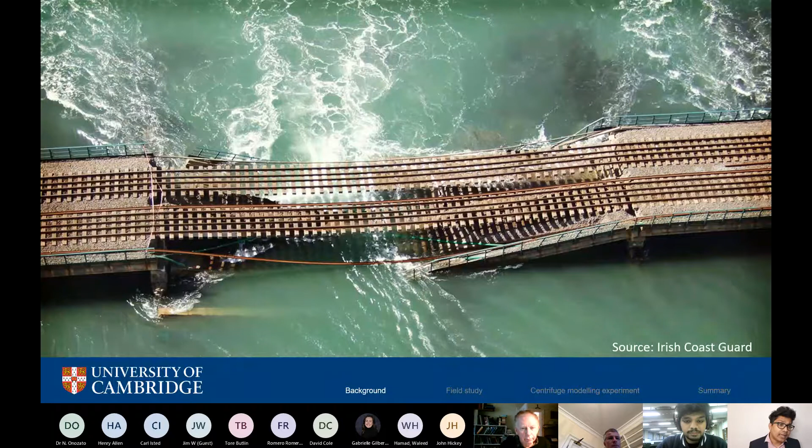Scour is a massive problem for bridge engineers. This is Malahide Viaduct, and this bridge failed because of scour, exactly 10 years ago in Ireland. If you look at some of the bridge failures that happen around the world, more than 50% of bridges fail because of scour. So that's a massive problem for bridge engineers.

What is scour? Scour is simply the removal of soil around bridge foundations because of the fast flowing nature of water. Looking at it without soil, without water, we can see what's happening: water hitting the bridge piers, and because of the fast flowing nature of water, scour holes are created around the bridge foundation. Since the bridge foundation is supported on the soil, if that soil support is lost because of scour, the bridge becomes unstable. This is exactly why a large number of bridges fail.

To avoid this from happening, we need to be able to monitor scour. Typically we can do visual inspections if there's a crack on the superstructure of the bridge, but scour happens underwater, so it's often difficult to observe because of the water layer. The current techniques for monitoring scour - the most common is diving inspection. Diving inspection does not provide reliable information because we can't carry out diving during flooding, which is when scour is highest, and it provides very limited, not very accurate information.

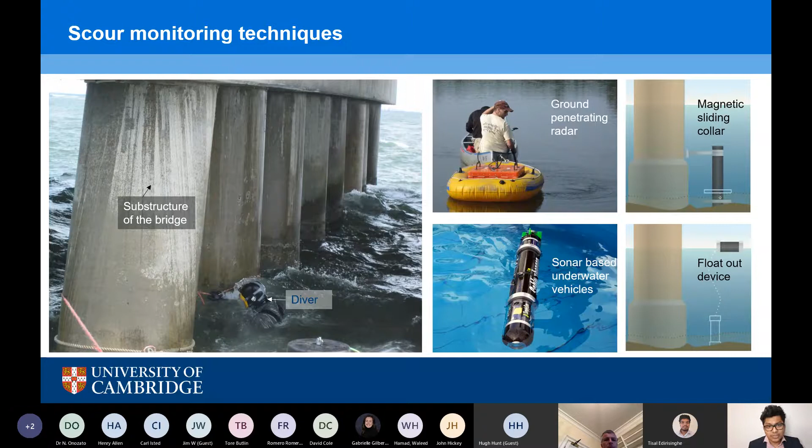Because of that, we can't measure that. The most common, or second most common technique, is actually using sonar. There are sonar-based underwater vehicles and sonar-based fixed techniques. These showed some good results, but there are still problems related to environmental sensitivities. So there are a wide number of monitoring techniques available, but they have a number of limitations. This is where vibration-based techniques can show some potential.

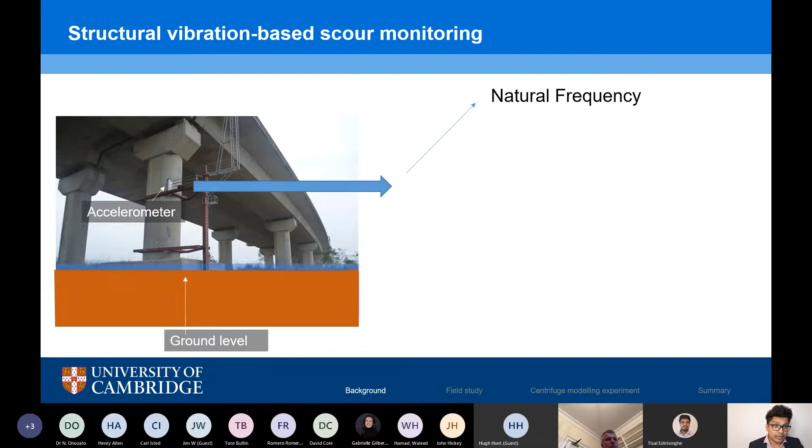Vibration-based monitoring techniques are very common. With vibration-based monitoring, what we simply do is place accelerometers on a bridge and measure the vibration-based properties. The idea is that whenever damage occurs, the vibration-based properties would change. The most common parameter is natural frequency, and there are other dynamic parameters as well.

For the case of scour, scour is basically an increase of the exposed height. So in the case of scour, this h is increasing while all other parameters are constant. If h is increasing and all other parameters are constant, we can see there's a significant relationship between natural frequency and the exposed height.

For this very simple case, where we assume the ground level is fixed - which is not the case in real life - we can see that natural frequency and exposed height have a significant relationship. Because of that, we can assume scour has a significant relationship with natural frequency. Previous researchers proposed that natural frequency can be used as an indicator of scour, but there's very limited information on other dynamic parameters. In my research, I proposed we can use two other indicators as well.

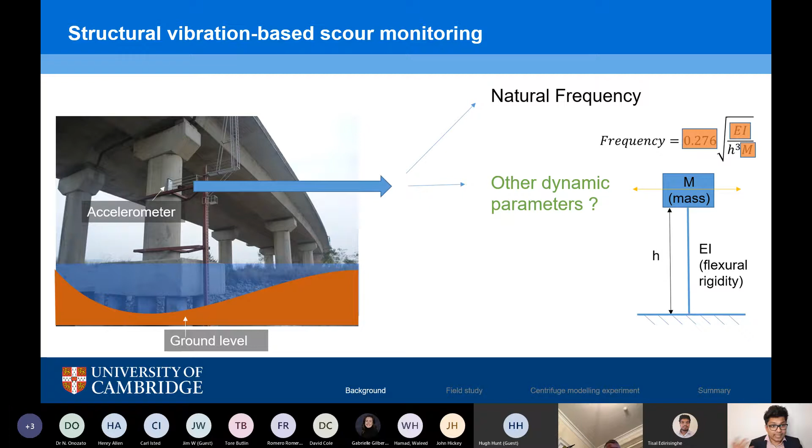But with scour, what we actually have is a global stiffness change, because it's actually a boundary condition change. So we can expect a more significant effect from scour than from cracks. If you look at existing literature on field studies to capture scour using vibration, there is one research conducted in the US.

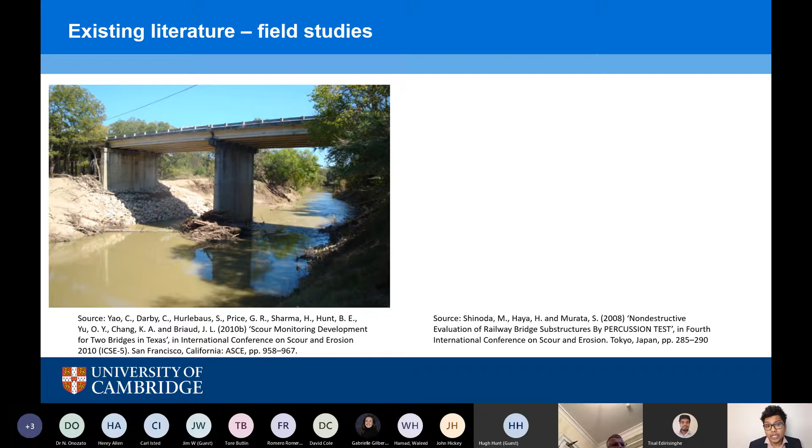They deployed accelerometers on two bridges in Texas - this is one of the bridges. But the issue is that during the monitoring period, they were not able to capture any significant change in natural frequency. In Japan, researchers have been able to actually capture natural frequency changes at a bridge there.

This bridge had about six bridge piers, and these piers had different amounts of scour. They were able to look at the natural frequency of each bridge pier and show that natural frequency of different piers correlates to their level of scour. So this research was successful in indicating that natural frequency and scour depth have a relationship.

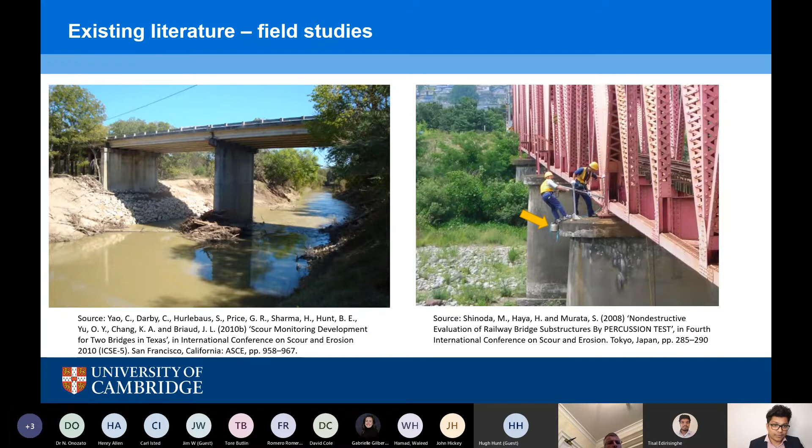But with this research, because they were trying to measure natural scouring, they were not able to get enough scour to change the natural frequency by a significant amount. So we actually decided to take a different approach.

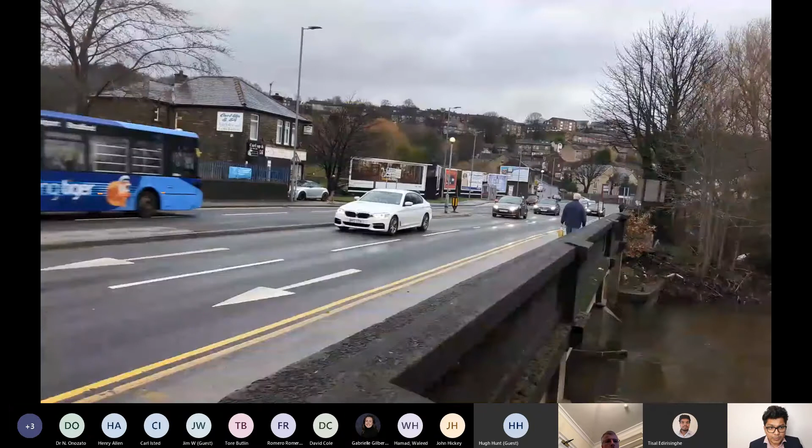Rather than looking at natural scouring, which is very unpredictable, we went to a bridge which already has scour - that's the Baildon Bridge. My supervisor sent an email to many bridge owners in the UK, and they found this bridge. This is Baildon Bridge, and it has three spans, with a history of severe flooding.

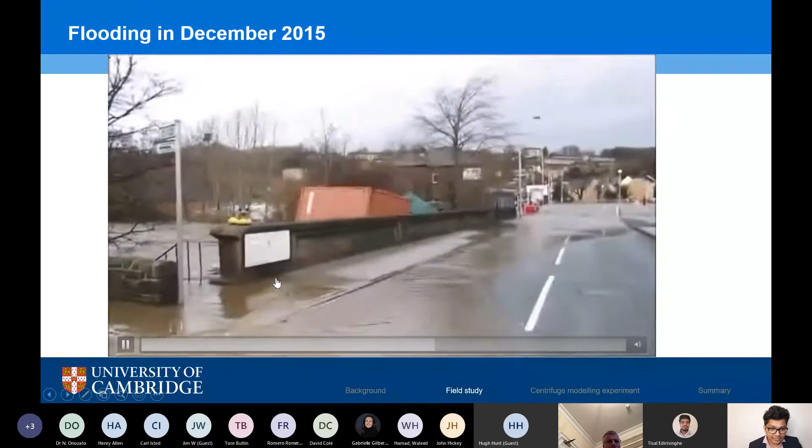You can see that the level of flooding is almost up to the level. So what we did was we went to this bridge, and because this bridge has scour already, we wanted to find out what is the level of scour at this bridge.

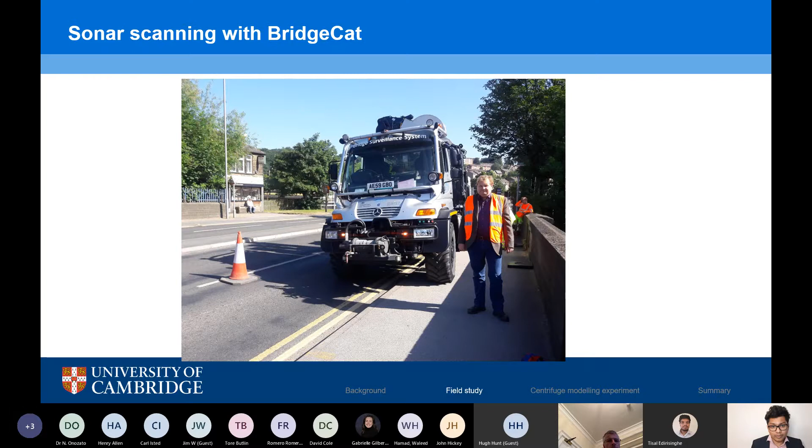So what we did was there's a sonar scanning vehicle developed by BridgeCat, owned by the Department of Transport. We managed to get this vehicle to the bridge, which has a sonar scanning head at the end, and we placed that sonar scanning head underwater and took a riverbed profile.

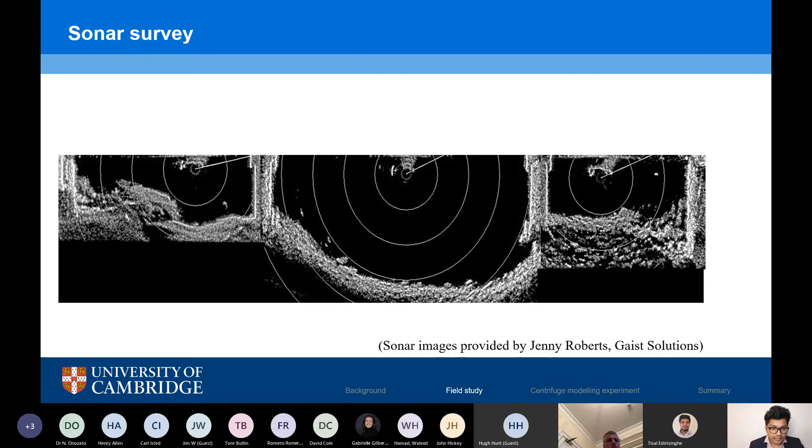We can see that this is the ground level before the repair started. We took another sonar scan after the repair finished, and with that we could show this is the ground level before the repair started, and this is the ground level after the repair finished. You can see, especially near the South Bridge Pier, there is a significant amount of ground backfilling. So what we have is before and after scour, we have the riverbed level change.

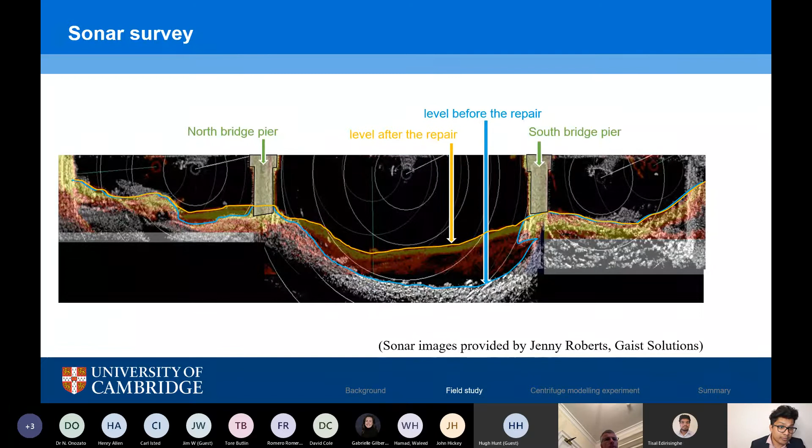Right after taking the riverbed profile before the repair, we created a finite element model of the bridge, and this is that finite element model. This is a standard finite element model. What's unique is that we have used a Winkler spring model to provide the soil pile interaction.

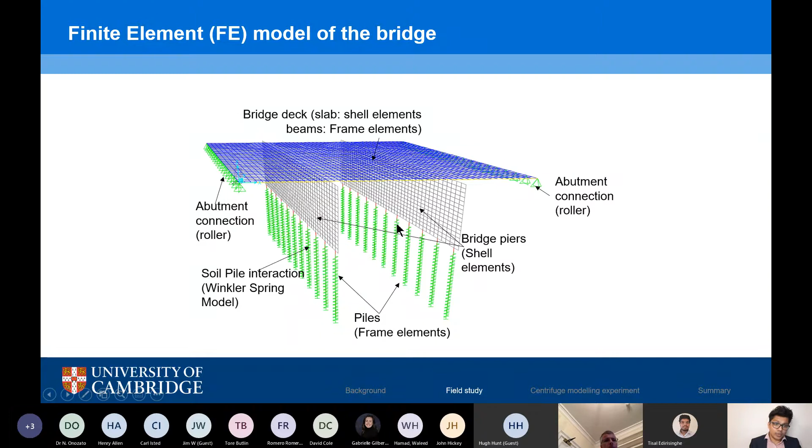So we produced this FE model, and we simulated scour by deleting the springs wherever there was scour. For example, at that South Bridge Pier, there was scour there. So we deleted the springs to represent scour, because scour is basically removal of the soil, meaning soil structure interaction is removed.

So we found that the estimated natural frequency according to the numerical model after backfilling should be around 17.1 hertz, and before backfilling scour it should be around 16.3 hertz. This was before any instrumentation. So we found out that the expected variation in natural frequency was not very significant, 17.1 to 16.3.

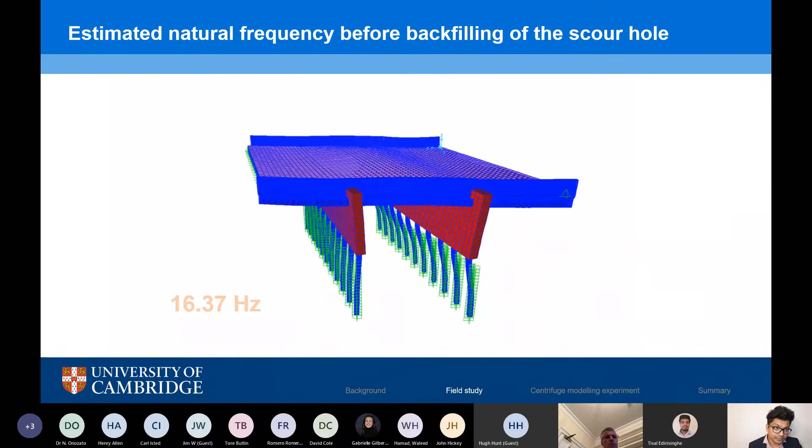So we needed very high sensitivity accelerometers. We took these Epson accelerometers, which have very high sensitivity and very low noise in the range of micrometers per second squared. We placed 10 of those accelerometers at different locations of the bridge, and we placed 7 of those along the edge of the bridge, along one vertical plane, so we can get the mode shapes along that vertical plane.

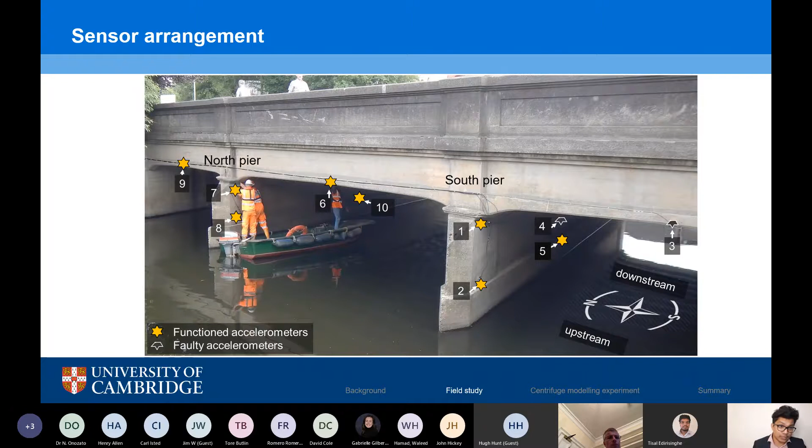Unfortunately, 2 of the accelerometers did not work, so we had 8 accelerometers providing ambient vibration data throughout the 6 month period during which the scour and backfilling occurred. This is me actually trying to keep my balance.

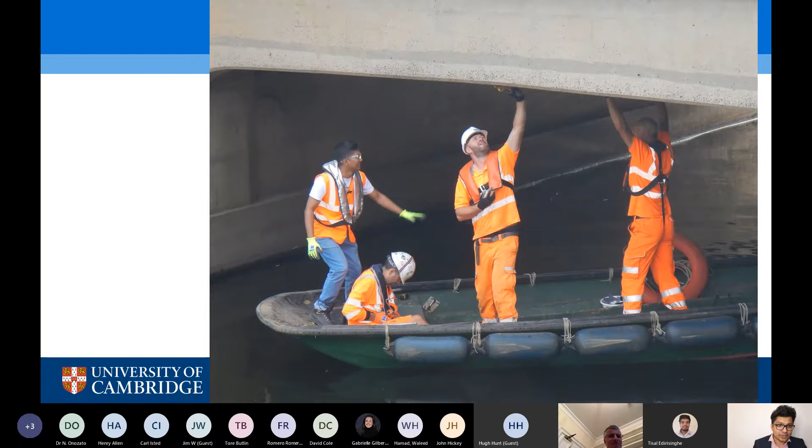It's a very unique experience, because placing accelerometers on a boat was a very fun experience, and keeping your balance on a boat is a real experience.

So this is the final result I got. When I look at the natural frequency data, I found that the natural frequency data captured experimentally had a significant amount of variation.

For example, the natural frequency we captured for mode 2 was around 18.5 hertz, but that 18.5 hertz varied: one measurement is 18.6 hertz, the second measurement is 19.1 hertz, the third is 17.5 hertz. So there's a significant amount of variation, accounting for around 5% from the mean value. According to the numerical model, the estimated variation for 1.8 meters of scour was also in the same range.

Unfortunately, although we captured the natural frequencies at this bridge, the experimental variations we captured were significant. Because of that, we could not capture the natural frequency change due to this backfilling process. So what we did was look at, if there was extensive scour at this bridge, what would have happened? For example, we consider this blue line case.

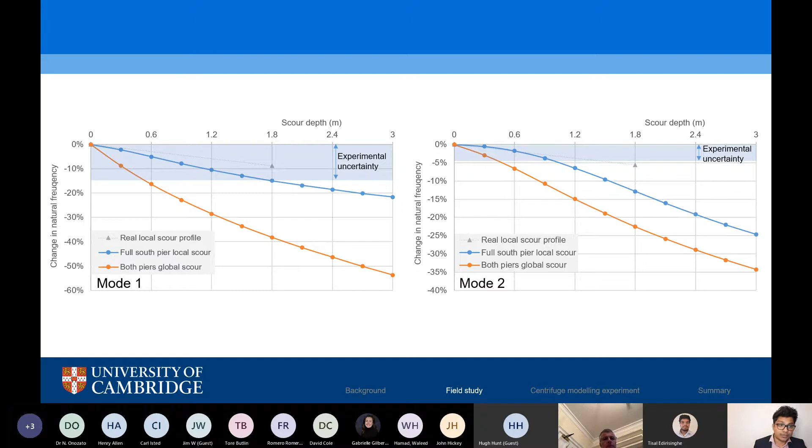This was a bit of a discouraging finding, because we actually went to the bridge to capture natural frequencies, and we could not capture that. But we actually saw some other parameters that indicated some indication of scour.

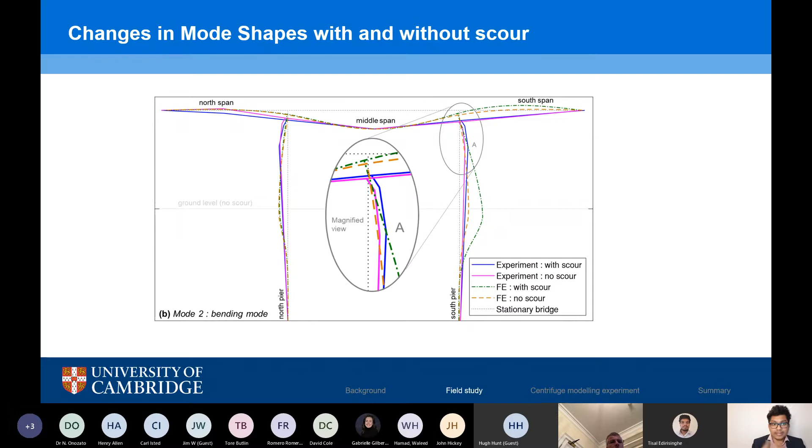So this was only one of the findings. We wanted to study this further, and I'll show you some of the experiments we conducted in the laboratory to study this in detail. The second indicator we found was mean spectral density.

This was also an unexpected finding. Actually this showed much clearer change. When we look at the mean spectral density, when we started backfilling scour in August to when we ended backfilling scour in November, there was a clear gradual reduction in the mean modal spectral density.

This is basically whenever we look at the modal peaks of a mode shape, we have a modal peak, and at that modal peak, what is the power spectral density value? So if we plotted this, this is 120 points, different points, and what is that peak value? As you can see, the peak value actually gradually reduced.

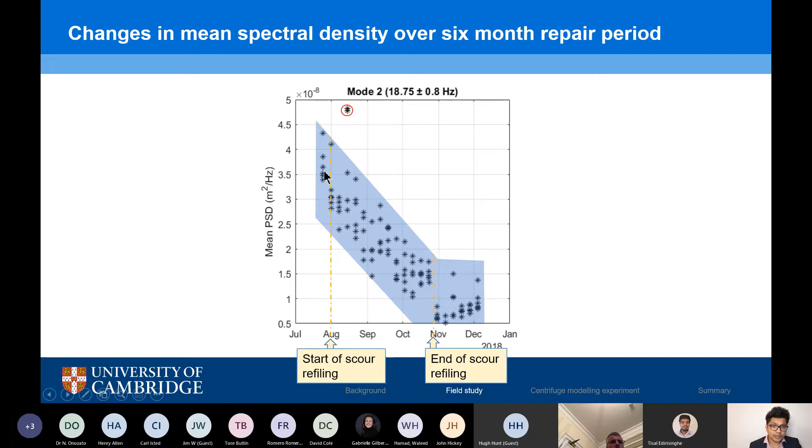This shows that there's some correlation between scour backfilling, the level of scour, and the modal spectral density. But although we found this in the field study, these could be some one-off findings. So we wanted to study this in a laboratory environment where we can control the level of scour, control the types of bridges, and control the types of scour to understand how we can actually capture the same variations.

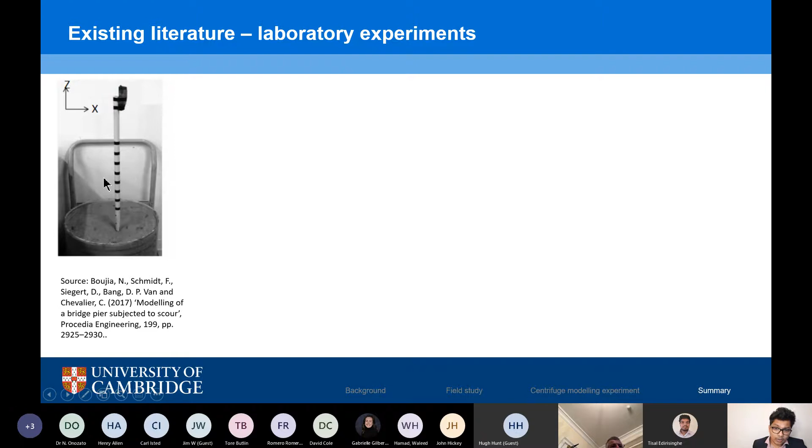There is some existing literature on laboratory experiments on vibration-based scour monitoring, but they have not been conducted on the geotechnical centrifuge. For example, some researchers have tried having a small scale bridge pier on a soil medium and removing soil there.

But if you do that, there are two problems. One is that this bridge pier does not represent the behavior of a full bridge. On the other hand, the soil structure interaction is inaccurate because it does not represent a full scale soil structure interaction.

To explain that: if you look at a full scale soil sample, we know that with depth, the effective stress is actually increasing linearly. So there is a direct correlation between effective stress and the elastic modulus of soil - the elastic modulus of soil increases as the effective stress increases.

If you look at a small scale soil sample, although it's small scale, we should have the same variation because it's the same soil - if the density is the same and it's the same type of soil, we should have the same variation.

The issue is that, because it's the same variation of elastic modulus, at the corresponding depths of full scale and small scale, we have different amounts of elastic modulus. So the elastic modulus here does not represent the elastic modulus there.

With soil, there's a dimensional component to the elastic modulus. This is unlike concrete or steel where we have the same elastic modulus everywhere. Because there's a dimensional component, if we scale down, we get an inaccurate elastic modulus profile.

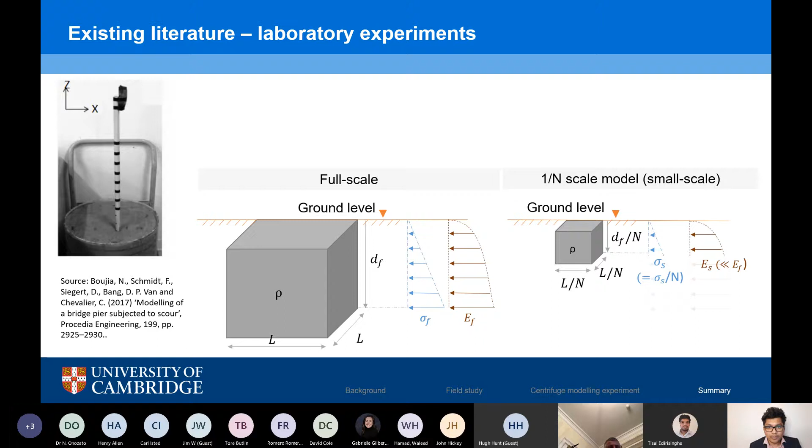This is a common problem, and for geotechnical engineers, what they typically do is test this in a geotechnical centrifuge. So we decided to do that, and to do so we considered different types of bridges and different forms of scour - three types of bridges in total.

We considered an integral bridge, where the connection from the bridge pier to the deck is fully integral - meaning the moment is fully transferred from the bridge deck to the bridge pier. We scaled this down by 60 times.

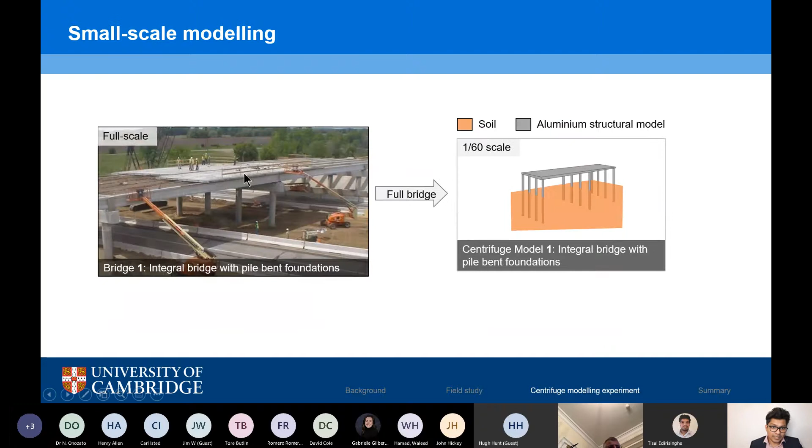We tested this in a geotechnical centrifuge package, which is about 850 millimeters. There wasn't enough package space to test all these different models fully, so for this bridge we considered the full bridge, whereas for the other types of bridges we only considered the foundation.

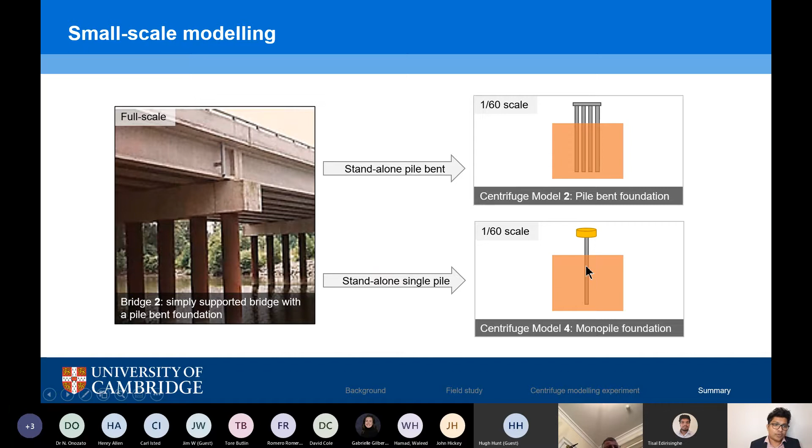Bridge 2 is a simply supported bridge with a pile bent foundation - we only considered the pile bent foundation, scaled down by 60 times. Since a single pile provides a simplified form to study, we also considered a single pile, and we wanted to study what happens for a shallow foundation, so we considered a shallow foundation model as well.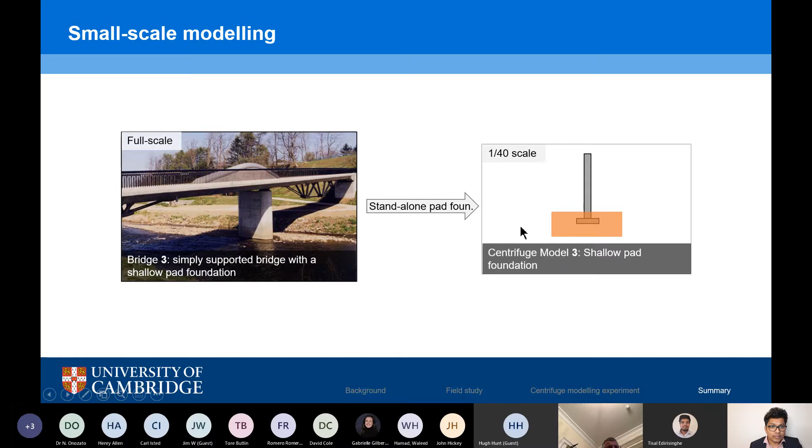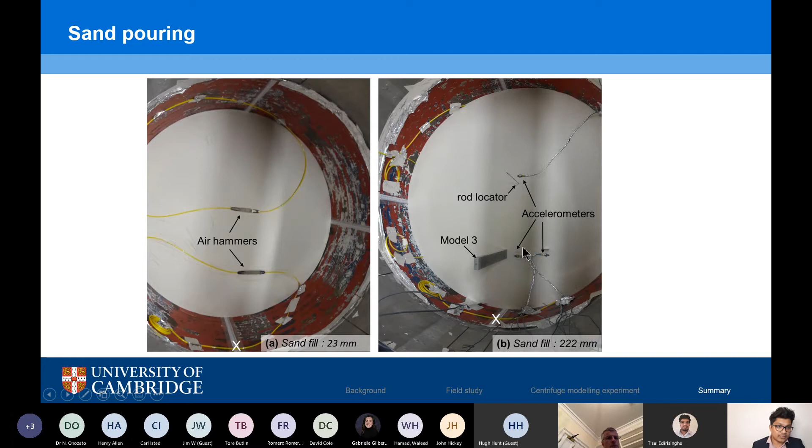We conducted these experiments at the Schofield Center at University of Cambridge. This center has all the facilities to prepare a uniform soil sample, and we had sensors placed in the soil, and we placed all these different models as the soil layers were progressed.

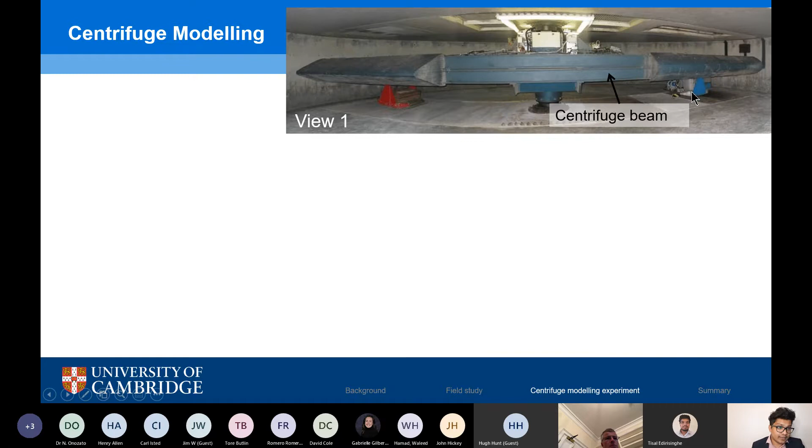This is the geotechnical centrifuge, as you can see here. The centrifuge is basically a beam about 10 meters in diameter, with two ends. At one end we can place the centrifuge package that we prepared, containing the soil structure model. We rotate this centrifuge beam to get the effective centripetal acceleration equivalent to the required acceleration - that's 60 times g for most of the models here.

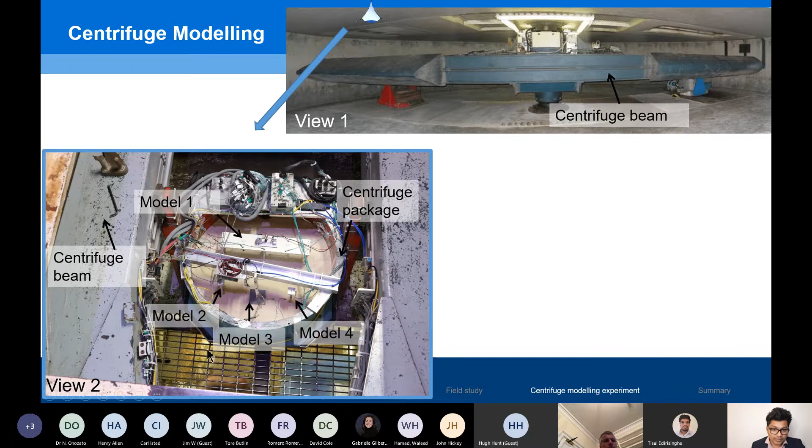These are the centrifuge packages - these are the different models I considered: model 1, model 2, model 3, and model 4. If you look at one of these zoomed in, this is model 1. You can see the scour profile we created around the bridge foundation at the middle bridge pier, and we had an actuator which excited the bridge model.

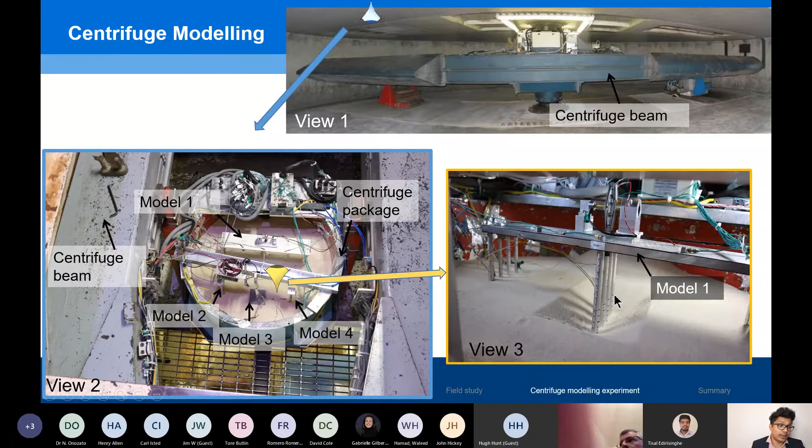This actuator provided an impulsive excitation. There was a load cell here, and we measured this load input excitation using the load cell, with a set of accelerometers placed on the bridge model to measure the response acceleration. We also had another actuator for the other models.

So what we had was two air sources coming in here, and this is an air hammer basically, which is connected to a kicker, and this kicker has a load cell at the end, and then this load cell goes and hits the model. We have accelerometers placed on the bridge model to measure the response vibration.

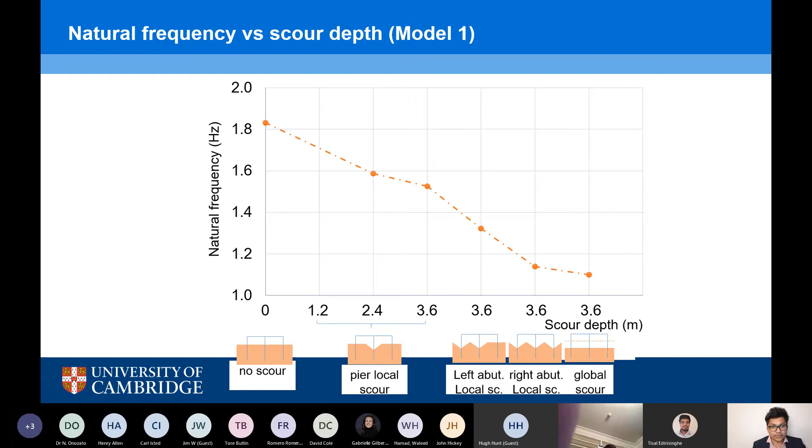So for each advancement of scour, we saw some reduction of natural frequency. This actually shows that natural frequency is a very sensitive indicator for scour.

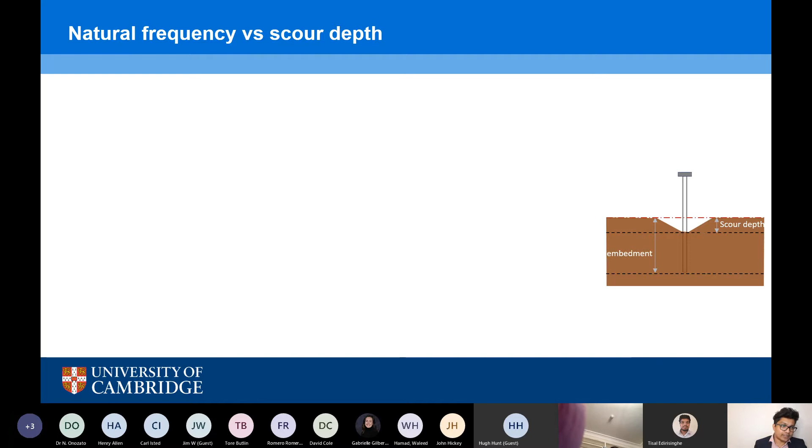If you look at the final result for all four models, considering the scour depth to be about 30% of the embedment depth, for the integral bridge we saw that for local scour at one pier and both abutments, if local scour is placed everywhere, the natural frequency variation was about 37%. If local scour was only at one bridge pier, the natural frequency variation was about 16%.

And if the local scour was only at one bridge abutment, that's like the two abutments at the end, the natural frequency variation was about 14%. And if the scour was throughout everywhere, global scour, the natural frequency variation was about 40%.

For pile bent foundation as well, that's model 2, we saw a significant variation of natural frequency. For pad foundation, unfortunately, we didn't see a significant variation, that was less than 5%. For monopile as well, we saw a very significant variation.

Although we see a significant variation here, if you remember the field study we carried out, according to that, when we try to measure these in the field because of environmental variations, temperature variations, and inaccuracies, we have to remove about 10% of the natural frequency for errors of measurement. So even if we remove that 10%, you can see there is still significant potential for natural frequencies to be an indicator of scour.

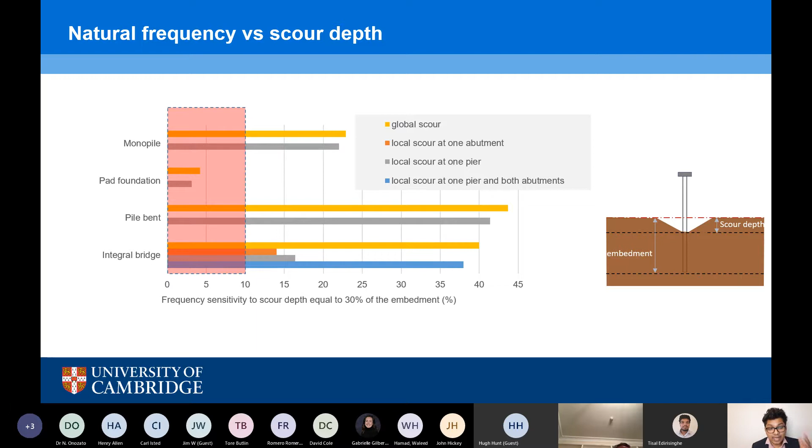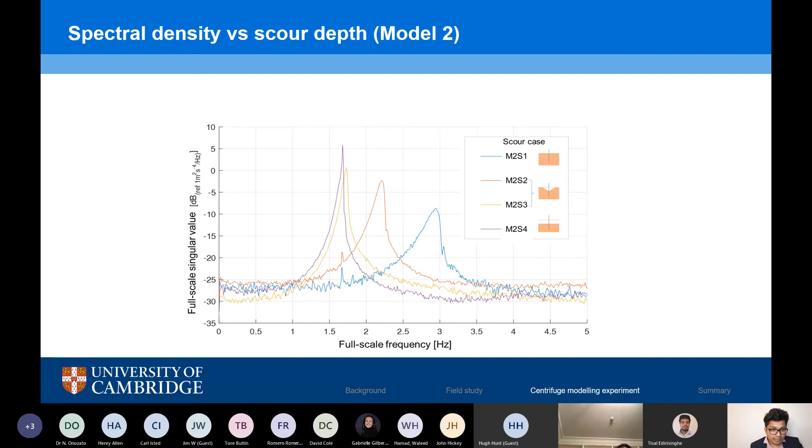A stiffening spring effect means the effective stiffness provided by the system is increasing with time. So perhaps that may have happened in the soil-structure interaction where, with vibration, there might have been ratcheting where the soil becomes stiffer as there is more vibration. That may be what's suggesting this leaning towards the higher frequency.

If you look at the spectral density variation for all four models, we actually see significant variations, huge variations. For the same case, looking at the singular value of spectral density variation for about 30% of the embedment depth, the variations can be as high as 28 times the initial value.

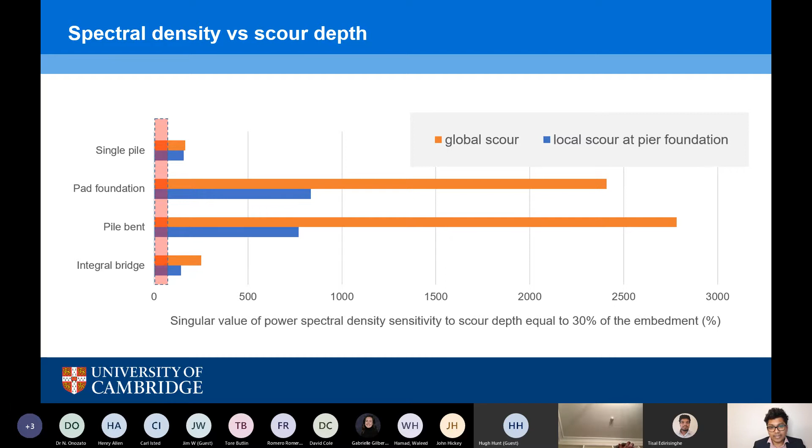But if you look at the field study, I found that the measurement variation can also be very high, so we have to remove about 50% for that variation. Even if you remove that expected field variation, we can see that for all the models, the modal spectral density shows significant variation. So in this case, modal spectral density can actually be a significant, valuable indicator for scour. The other indicator was mode shape.

If you look at model 4, for the mode shape variation, I'm showing the higher scour cases with lighter colors: no scour case, 1.8 meters of scour, 3.6 meters of local scour, and 3.6 meters of global scour. As you can see, when we increase the level of scour, the line becomes lighter, and you can see the mode shape is actually increasing.

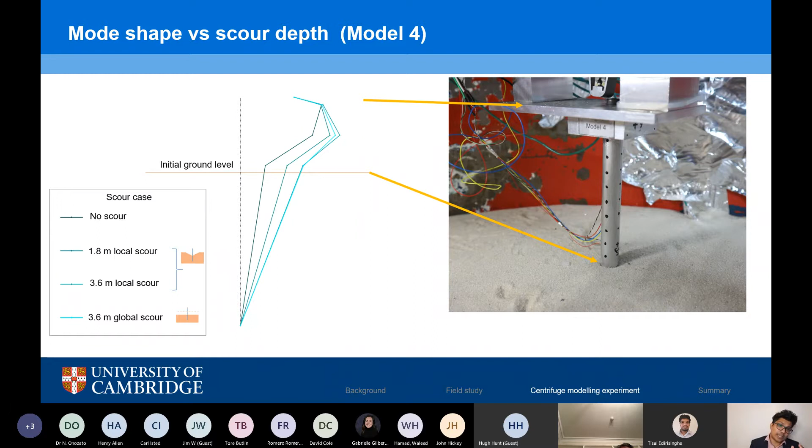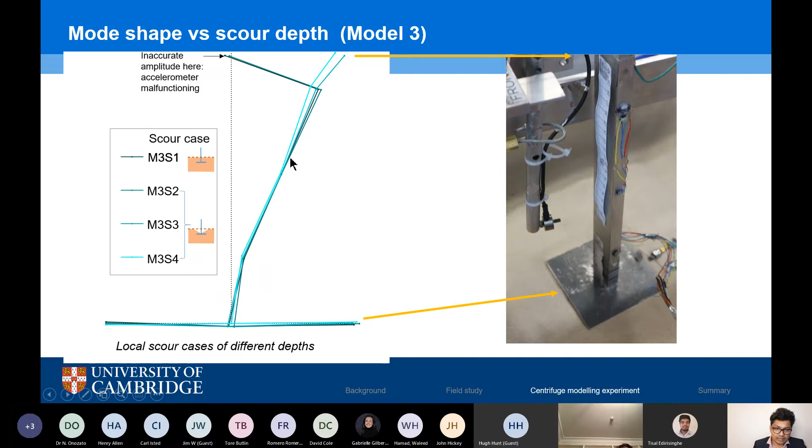The mode shape is normalized by the mode shape amplitude at the top. You can see the mode shape is showing some increase of the modal amplitude here, suggesting something similar to what we saw in the field experiment—the mode shape showing an increase at the location where there is scour. But for model 3, the shallow foundation, we did not see a clear increase of mode shape.

For the case of model 1, these are different scour cases. The dark line shows no scour case, and the lighter colors indicate slightly higher cases of local scour at the middle bridge pier. At this location, with the lighter colors, you can see the modal amplitude has actually increased, but the issue is the modal amplitude should not increase there, yet it has gone up and down. This suggests maybe there have been some measurement errors, or mode shape is not a very reliable indicator of scour, because there can be some inaccuracies.

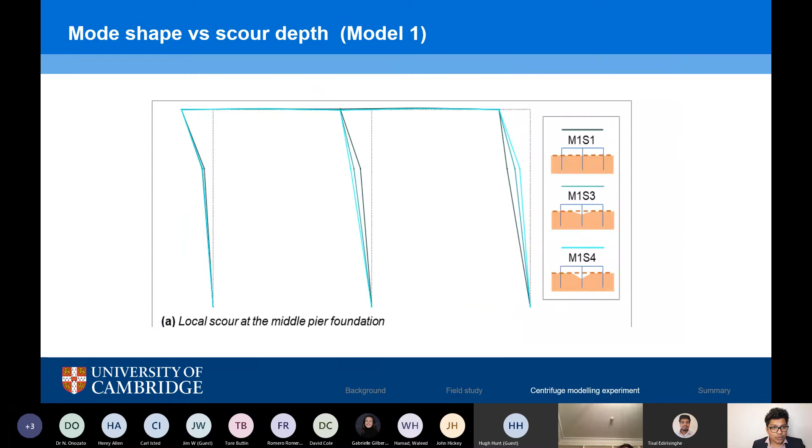So that's all the experimental results. Now moving on to the numerical modeling that I carried out as part of my research.

There has been significant research conducted by Prendergast and Professor Gavin. What they have done is consider this vehicle-bridge-soil interaction system, simulating the traversing of vehicles using a spring-based system. How they simulated scour was simply by deleting the springs—if there is scour, they deleted the springs because that means the soil has actually been removed.

If you look at this in detail, this is the no scour case—let's say this is a bridge pier. With local scour, what happens essentially is there is a localized creation of a scour hole, but the soil surrounding the scour hole remains the same.

So in this case, we have a doubt here, because we know that the soil stiffness increases with depth like this. But what happens after there is a local scour case? Because if we look at it from here, we can see that the springs supporting the soil structure interaction are removed. So we can actually delete or remove the soil stiffness here.

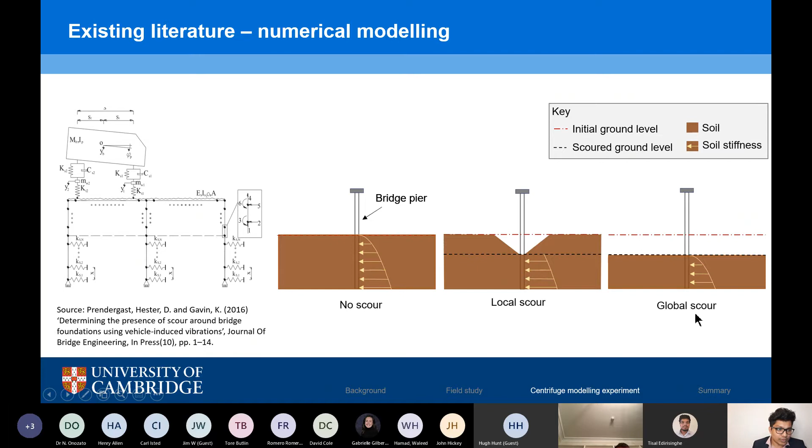I'll explain one of these models I created. For bridge one, the full bridge, I created this numerical model. This is a standard numerical model created using CSI Bridge software, and we used link elements to show either the fixity or the Winkler spring model.

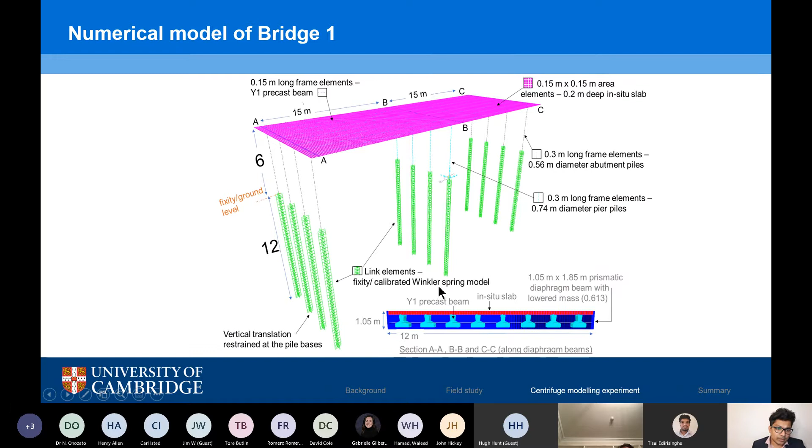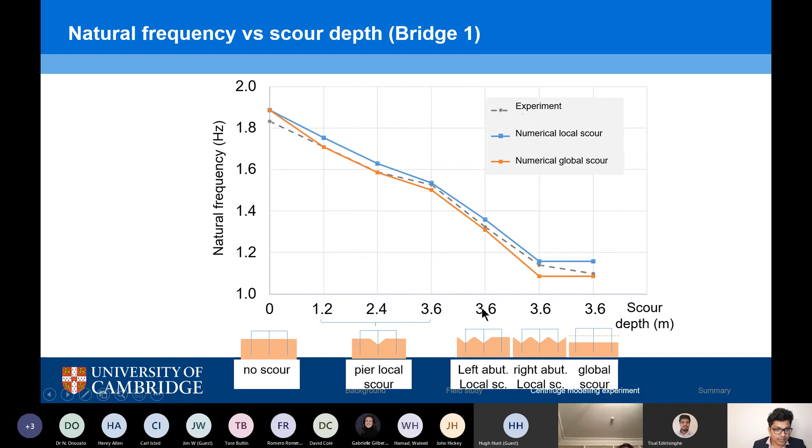So when I simulated the local and global scour cases for this bridge using numerical modeling, I saw what I saw in the field study: whenever there is scour, for example here, these are different cases of scour only at this bridge foundation—1.2 meters of scour, 2.4 meters of scour, and 3.6 meters of scour. So if there is local scour only at that bridge foundation, according to the FE model, the increase of modal amplitude is localized to that bridge foundation.

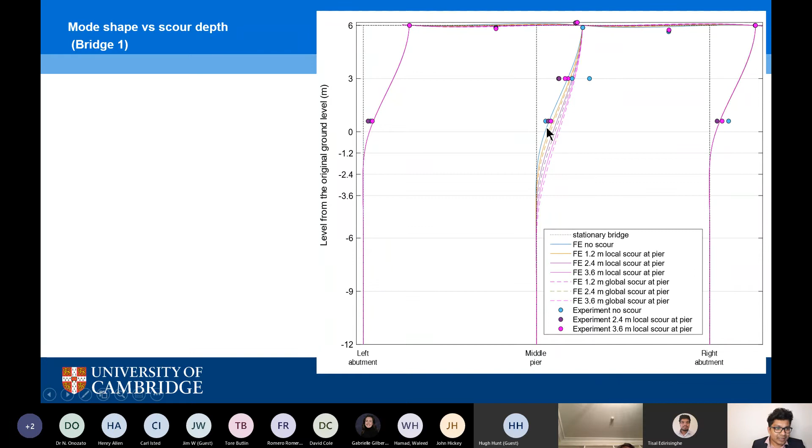So this is suggesting that we have the potential to capture the variation of scour at bridge foundations as a localized increase of modal amplitude. But experimentally, we saw that variation, though it's not very clear experimentally.

So the comparative limitations and advantages of this monitoring technique: one limitation is that the maximum possible scour depth resolution is about 0.5 meters to about 1 meter, but not centimeter scale resolutions as in sonar. If you remember the sonar scan profile I showed you that we captured during the field experiment, that actually provided centimeter scale resolutions, but with vibration-based methods we can only get about 0.5 to 1 meter resolution. Also, we can only measure a change, not the scour depth directly after the first measurement. For example, with sonar, we can go to a bridge, do the sonar scan, and say this is the level of scour. But with vibration-based techniques, we can't go to a bridge, place accelerometers, and say this is the level of scour.

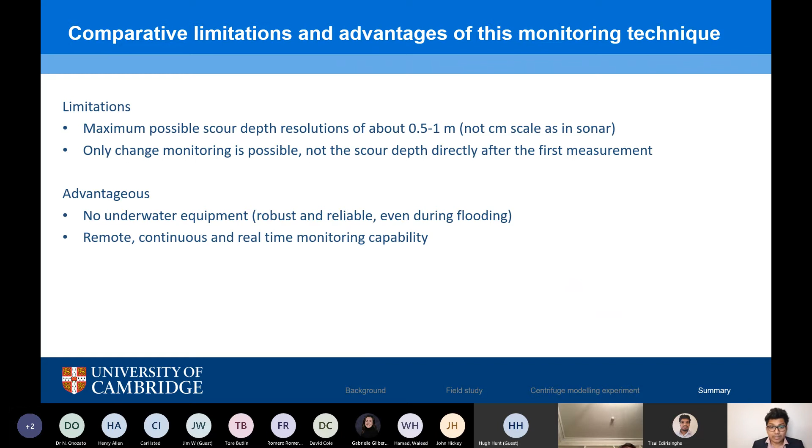We need to capture a change, so we have to measure vibration for a long period of time. The comparative advantage of this technique is that there's no underwater equipment needed, unlike most other monitoring techniques. This is probably the only monitoring technique where we do not need any underwater sensing equipment, because we actually measure the vibration of the bridge. This also has the capability to become a remote, continuous, and real-time monitoring technique.

In summary, we were able to demonstrate the potential of vibration-based monitoring techniques using a field trial, centrifuge modeling experiment, and associated numerical modeling. This is actually the first conclusion from my thesis.

A vibration-based monitoring technique examining the combined effect of three vibration-based parameters—modal spectral density, mode shape, and natural frequency—has the potential to identify and locate changes in scour depth at bridge foundations to approximately 0.5 to 0.6 meters, for local and global scour.

For about one third of the embedment depth, about 30%, which we studied in this experiment, we saw that the natural frequency changes by about 3 to 40% according to the centrifuge experiment. And mode shape showed an increase only near the foundation undergoing scour, meaning we can potentially use this to localize where the scour is located.

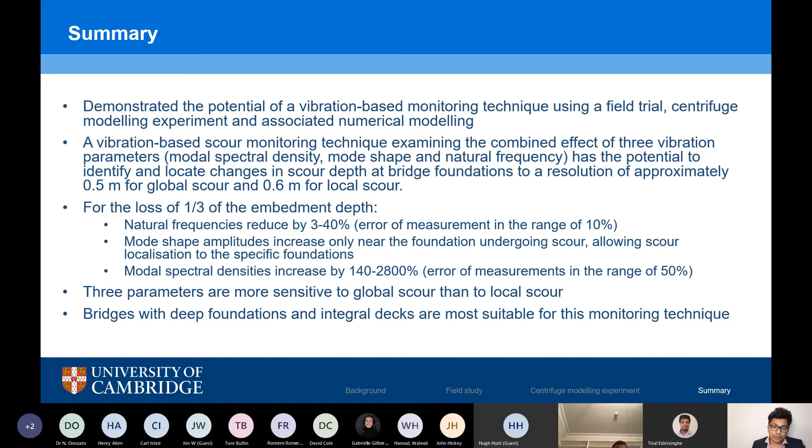Modal spectral density showed a huge change of about 140 to 2,800%, with error of measurement in the range of 50%. All three parameters showed more sensitivity for global scour than for local scour. We also found that bridges with deep foundations and integral decks have the most suitability for this monitoring technique.

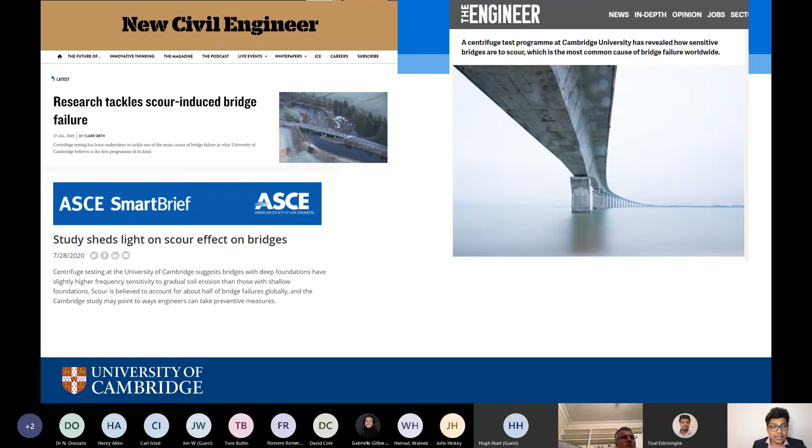This research got wide coverage recently, and some of our findings—for example, finding about a 40% variation of natural frequency using the centrifuge model—went to New Civil Engineer, ASCE, and the Engineer magazine. Our field study also got nominated for the British Construction Industry Awards and Highways UK competition.

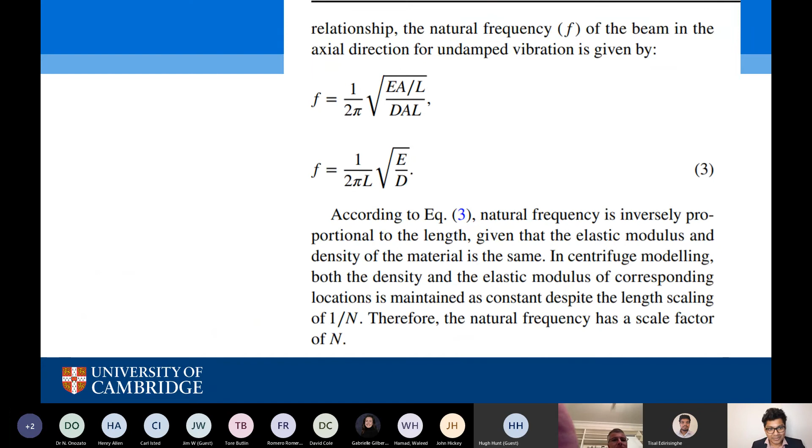I'm really looking forward to hearing your thoughts on this research, because you are really the world's experts in vibration-based monitoring.

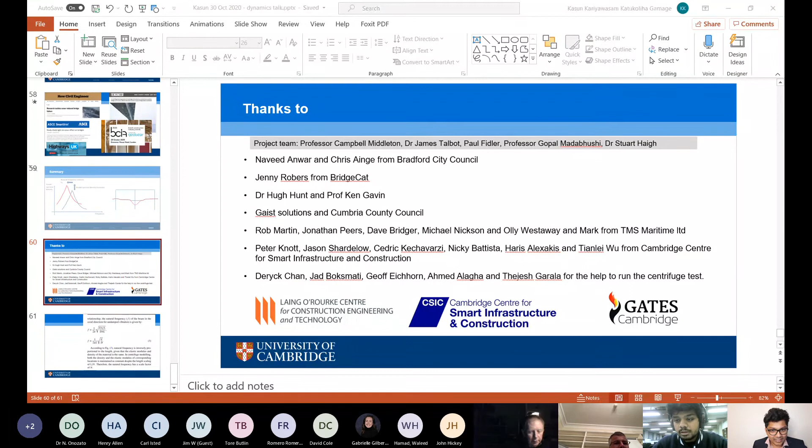Thanks very much for the interesting talk. I was just interested if you had thought about or tried to take account of the water depth, and whether that contributed at all to some of your experimental uncertainty.

In my experiment, for example the centrifuge experiment, one of the assumptions I made was that the level of water and the saturation does not have a significant effect on the variation of natural frequency. Some researchers, for example Prendergast and Professor Gavin, have studied this using different bridge piers at a small scale, and what they found is that given the bridge pier is stiff, the natural frequency does not get affected much by the level of water. So assuming the bridge pier is stiff, we can assume the effect of water depth is not very significant.

Okay, thank you. Do you have any? No. James has a question.

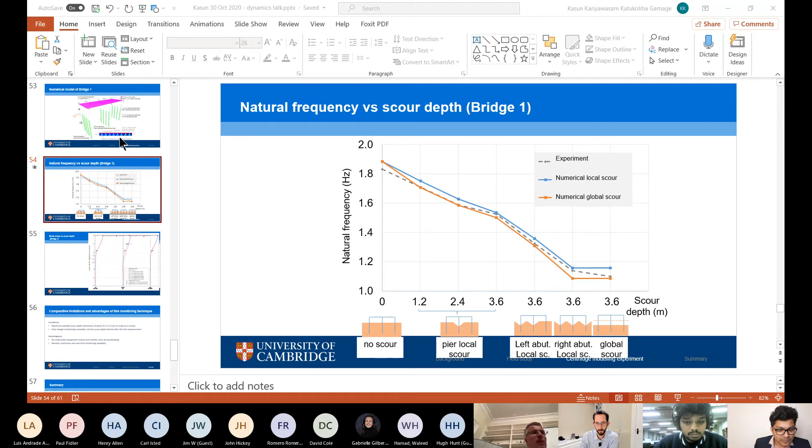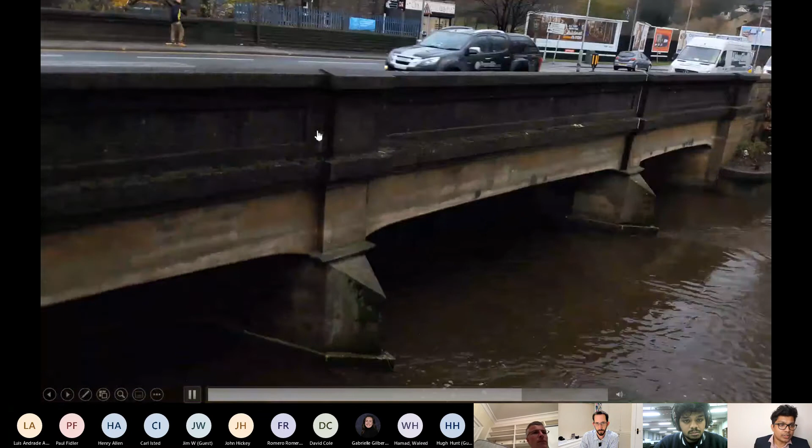Baildon Bridge had the vehicle, so this is basically ambient vibration. They have a large number of vehicles going over the bridge, and what we did was consider all the measurements we took—we had measurements throughout the day, but we only considered the measurements during peak hour traffic, when there was a large number of vehicles passing the bridge. We assumed that because vehicles with different weights and different vibration-based properties pass the bridge, there is sort of a wideband input for the 10-minute data sets we considered.

Yeah, good, thanks. Thank you.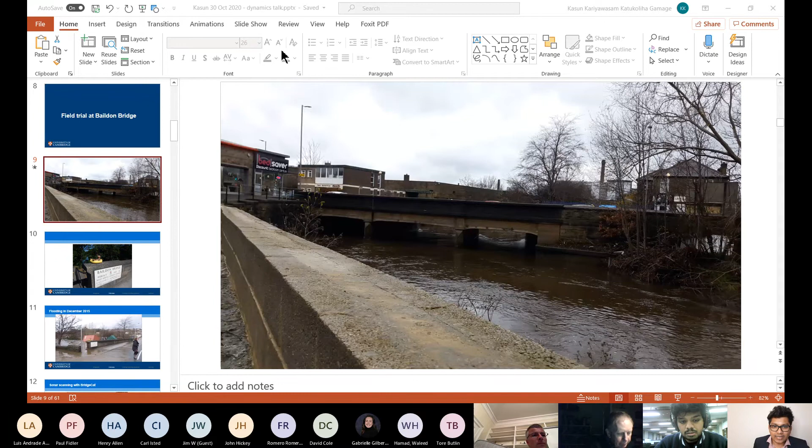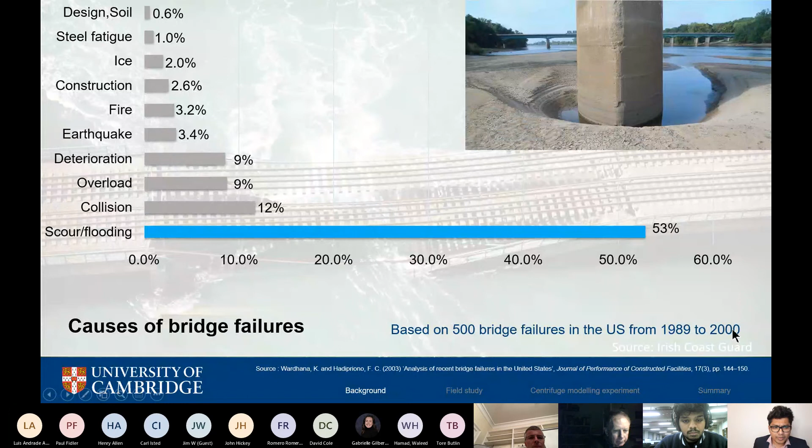So 50% of bridge collapses are collapses due to scour. This is actually collapses, yes, because if you look at the large timeframe, from 1989 to 2000. As far as I can remember, it was collapse, but I'll have to check it again because it could be there were large cracks and needed repair. But as far as I can remember, there were collapses.

And this is in the US. What's the situation in, dare I say, countries which perhaps have worse problems with infrastructure maintenance? Or perhaps the US is pretty bad, I shouldn't suggest that the US is good. The countries which have lots of flooding, where the bridges maybe not in such good condition as in other places.

Yeah, for example, Taiwan has lots of flooding problems, and I've seen lots of scour-based studies being carried out in Taiwan. In my actual thesis, I referenced different countries, for example New Zealand, Taiwan, China, and UK. Actually, if you look at almost all the countries, scour is clearly the largest cause for bridge failures.

So I remember as a kid, we used to go to riverbeds to go swimming, and we quite liked those. What you've got in that picture there, we quite liked those kind of mini little lakes because the water was nice and warm. So we didn't think of them as being a problem, we thought they were really good.

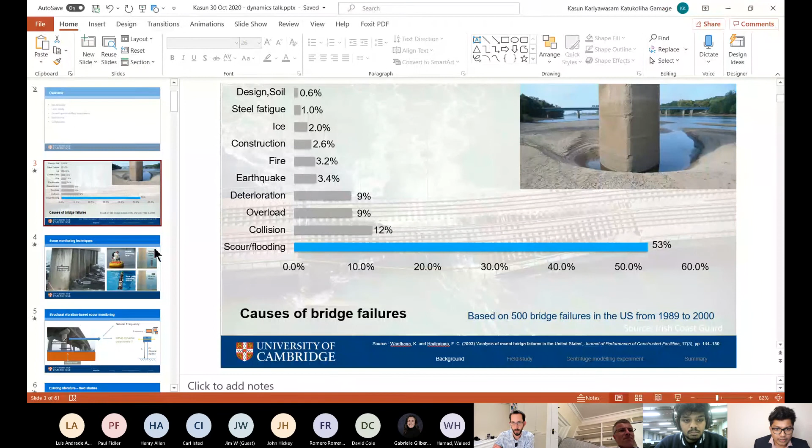Maybe that's because clear variation means in the sense whether the damping is reducing significantly because of scour. We showed some, it's reducing, going up, going down with, like, I don't know whether you understand - the damping values we estimated were not very clear cut, similar to the clear cut change we saw with the singular values.

Okay, that's interesting. And the singular values are kind of a combined metric across all of the different accelerometers, is that right? Yeah, yes, exactly. Singular value is basically giving a power spectral density of all the accelerometers.